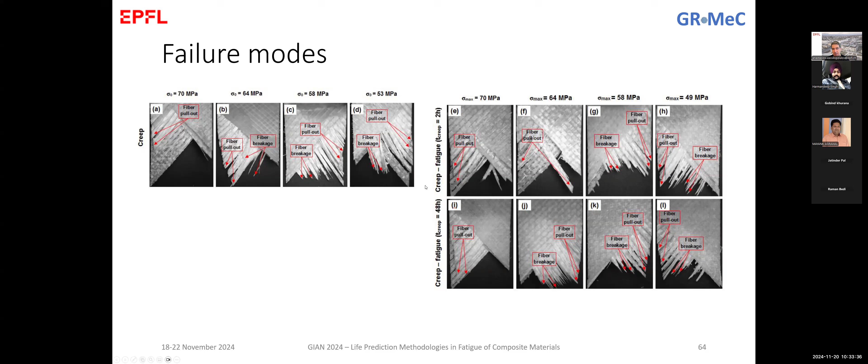So, probably we can, now that we'll talk about interrupted fatigue, using the same joke that we did yesterday, we can interrupt a bit for this first hour to take a break and resume in 5-10 minutes. What, Professor Bedi, if you are still... We can break for 5 minutes. Participants.

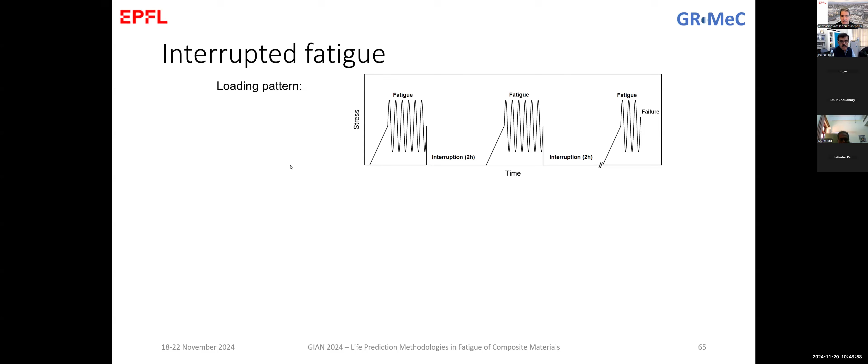So we'll continue with this interrupted fatigue loading to see how the behavior of the material is when we interrupt the continuous fatigue and we unload completely.

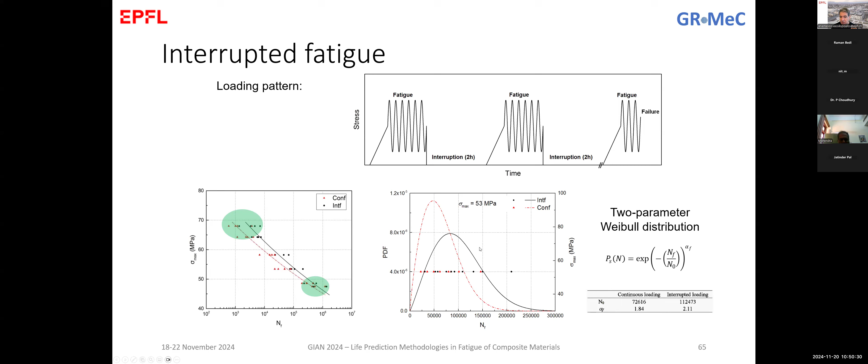There you can see that the behavior is improved quite significantly. From 70,000 cycles, we went to 112,000 cycles. This is the average, the median curve. And as we said before, it becomes more significant when we analyze statistically, when we go to 95% reliability, for example, this increase is significantly more. But at least, in a deterministic analysis, we see that we have 55% more lifetime when we interrupt the fatigue testing.

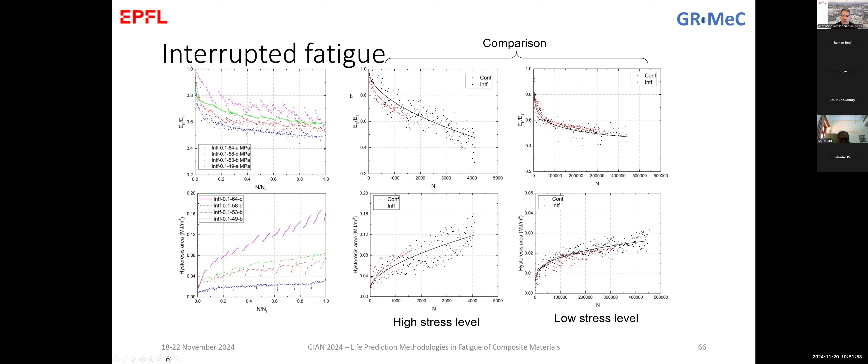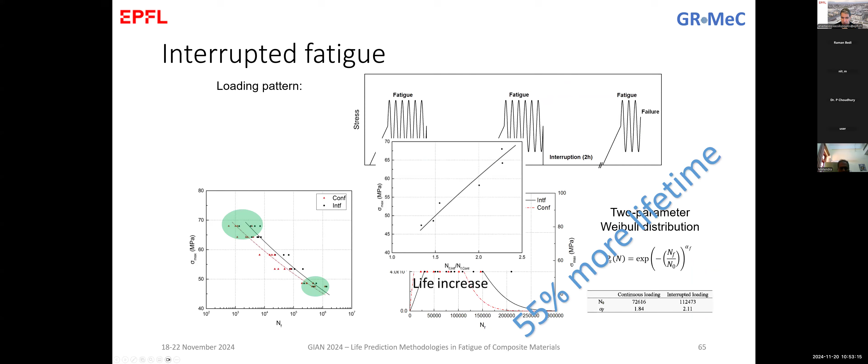And at lower stress levels, as we said before, we have similar behavior of interrupted fatigue and continuous fatigue. This is the reason that if you go back to the SN curves, at low stress levels, we see that the difference is not so significant between the two loading patterns.

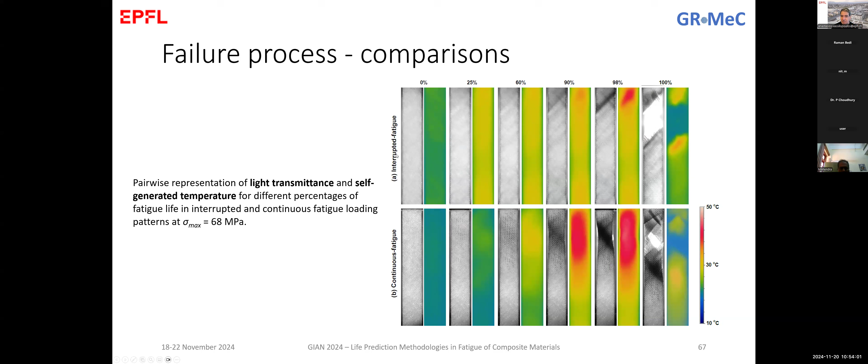So there we have the behavior for interrupted fatigue at high stress levels. We have the same behavior of the material as what we have in the continuous fatigue at low stress levels, in terms of deformation.

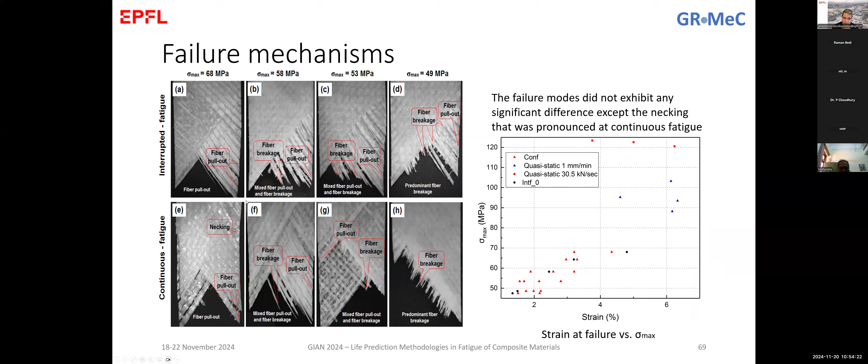So to summarize this material number 2, as we call it, we've seen a lot of increase of the lifetime when we interrupt periodically the loading. This increase, in some cases, you remember this 2-hour creep load interruption - so even if we interrupt the load at the high stress level, sometimes we have increases because of this.

And this is a kind of trigger to make us question the characterization methods and the standardization. Because imagine now that you are discussing and analyzing materials for a structure, and you want to investigate the material behavior to get material properties to use them for your design.

You follow the standards that say you have to do constant amplitude testing for a composite material to derive material properties, and then you use this material in a structure operating under interrupted loading. So by following the standards, you underestimate your material properties. You end up suggesting a material that in reality can sustain more lifetime than the lifetime you are designing for. You are more safe in your design, but at the same time you are over designing, making a structure that is more costly than it should be.

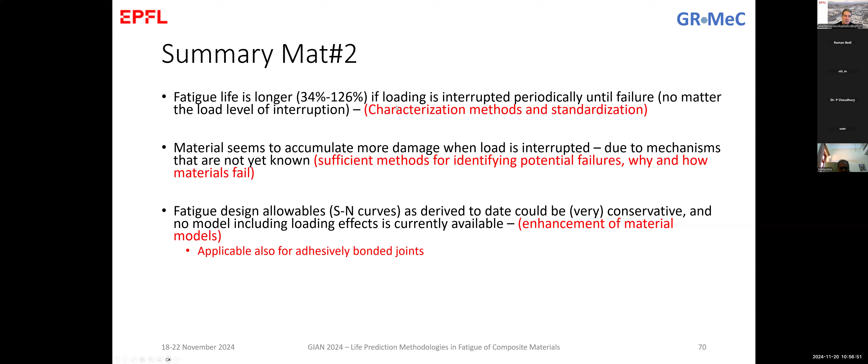And I will summarize this. There's nothing else to say here, I think. So I will continue.

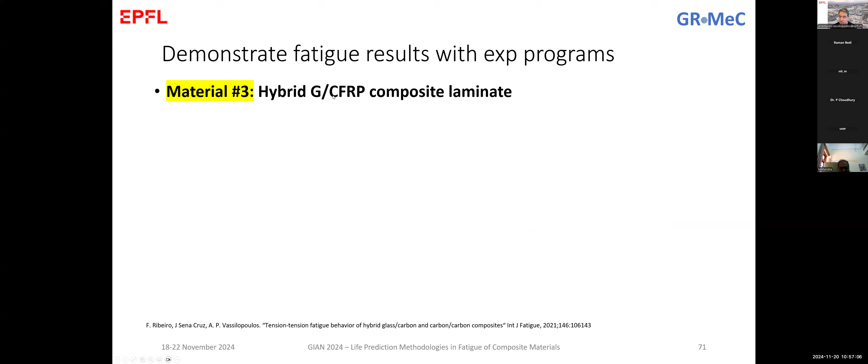Now with another material system, I will go faster and faster. This is a glass and carbon hybrid composite laminate, and we would like to see how this material performs.

I show the material characteristics. Carbon fibers with high modulus, carbon fibers with low modulus, and glass fibers were mixed together in different configurations, causing static and fatigue results. The objective was exactly to investigate the hybrid effect. I don't know if you are familiar with this terminology - what is the hybrid effect in composites, either for static or fatigue performance?

Actually it is the effect of mixing two components. If we go back to the simple notation of a composite material, and if we have a stress and strain curve, we know fibers are very stiff and strong, and the matrix we are using is less stiff and more ductile. When we mix these two, we have a material with a performance that falls in between - this is the composite, this is the fiber, and this is the matrix. So we do not expect the performance of the composite to be better than the fiber or worse than the matrix; it should be in between.

This is also defined - the properties of this composite can be defined by the rule of mixtures, which says that the properties depend on the percentage of these two materials. The hybrid effect is an effect we have in certain configurations of materials, where the properties of the composite we are building sometimes override and become better than the best one of the materials used for the analysis.

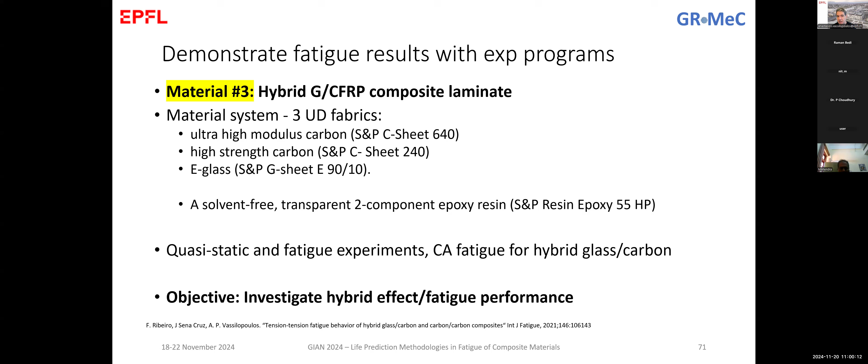This is done because of the hybridization of the properties of the materials used for the mixing. In this case, what is the parameter for the hybridization? The difference in these materials is that the glass fibers, although less stiff and strong than carbon, sustain more strain up to failure. So they introduce ductility to a very stiff system, and this is the reason that this combination of glass and carbon fibers gives a lot of benefits over a pure carbon composite material.

I'll go very fast through these material properties - I will not discuss in detail, only coming back to the initial consideration that carbon fibers are very stiff and very strong. The elastic modulus is 200 gigapascal, and high modulus carbon fibers have 500 gigapascal, with strength very high, around 3 to 4 gigapascal. Glass fibers have a typical 76 to 80 gigapascal modulus, and of course are less stiff, but the strain at failure is 2 to 4 or 5 times more than the strain at failure of carbon fibers, and similar to the strain at failure of the epoxy resin, to have compatibility between them.

These materials are typical materials used in civil engineering, mainly for reinforcement of concrete - these are strips that are glued on concrete slabs to reinforce them.

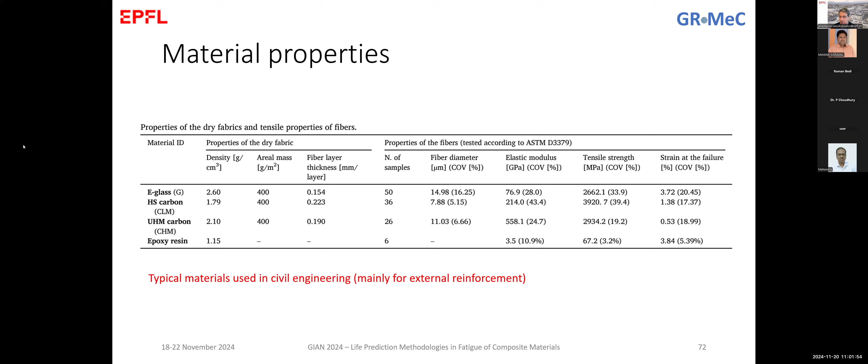That was typically a disturbance, somebody's mic was switched on. So only if there is a question, do not hesitate to interrupt me.

We did several material combinations: carbon and carbon, meaning layers of low modulus and high modulus mixing together, and also combinations of glass and carbon with high modulus mixing together. We selected this high modulus exactly because of the difference in strain. The high modulus has 0.5 strain at failure, glass is 3.7. So we mixed these two to investigate if there is any hybrid effect, and the performance of this material.

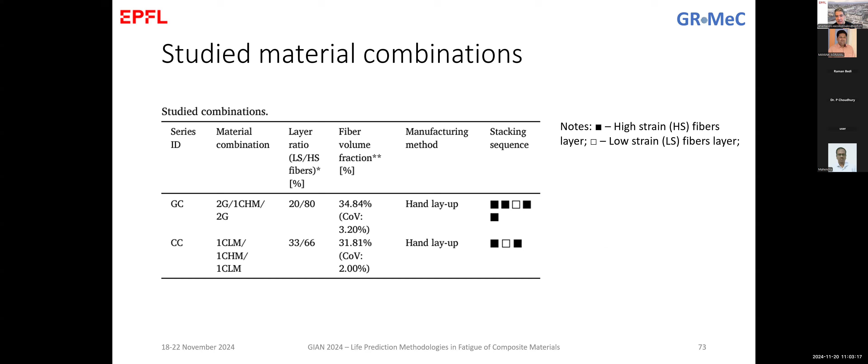We wanted to see if we could create ductility in the system. The material itself is not ductile, but by mixing these two components together, we can artificially create ductility, and that's why we call it pseudo-ductility. It's not a ductility of the material itself.

The setup is similar to what we had before. This is the same machine that we used before, but the chamber you see down there now - we pushed it out of the machine. You can just take it out with racks that we have here, and the specimen is now outside of the chamber. The reason for removing the chamber was because these specific specimens are not heating a lot, so we could do fatigue testing at relatively high frequencies of 10 Hertz without the problem of heating.

We had a DIC camera to take photos and measure the full field strain on the surface, and we had also a high-speed camera that has been used to identify the failure modes.

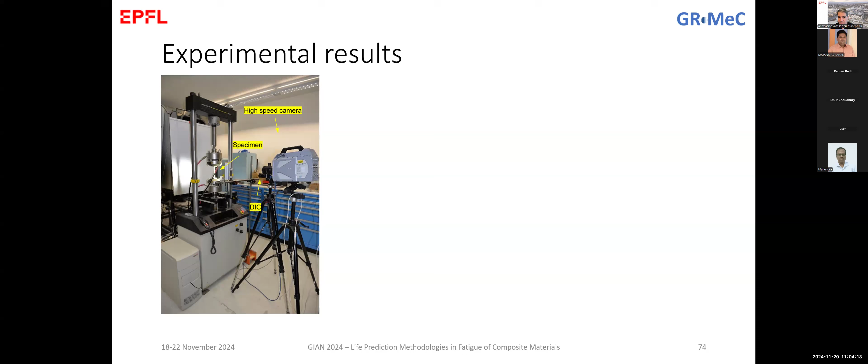This is a very significant effect, because this can help in structures. When a structure fails, the problem we have with composite materials is they are very brittle and fail without prior notice. So we can have a structure that works perfectly, and then this structure fails without any notice.

If we have this behavior, we see that there is redundancy in the system. We start having some failure, but the structure does not fail at that point. It can continue in terms of strain and stress until much later, and this is an indication for us that something happens to the structure. The stiffness you see already is lower here, and we can identify the problems and repair. At the end of the day, you can even save lives with this performance.

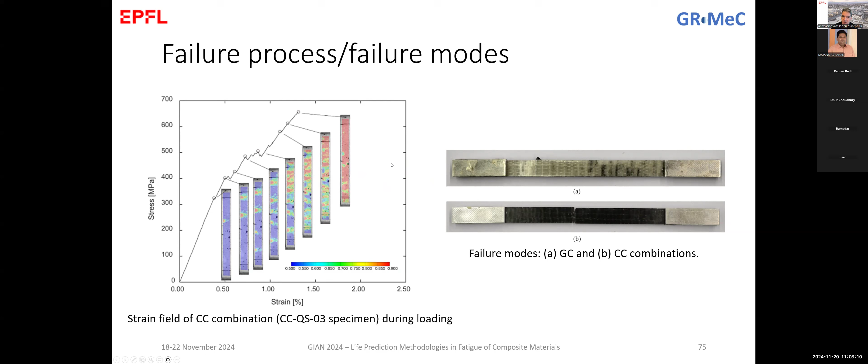If I can assign this to this issue, here you see also a bit of this bilinear behavior, and this behavior starts - the change in stiffness that you can observe in the previous photos and also in this one is starting when you lose the contact between the glass and the carbon, or when one of the layers starts failing. And this creates this damage. What is good here is that you don't have the linear behavior that leads your material to failure at a certain point without any notice of damage in the material. This is the benefit of using these combinations to create this ductility in the system.

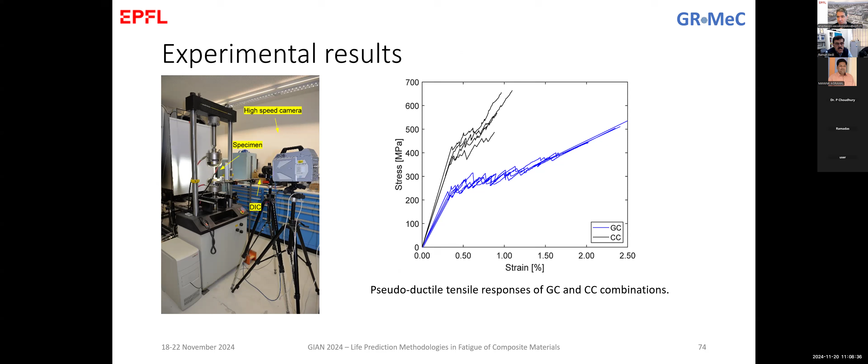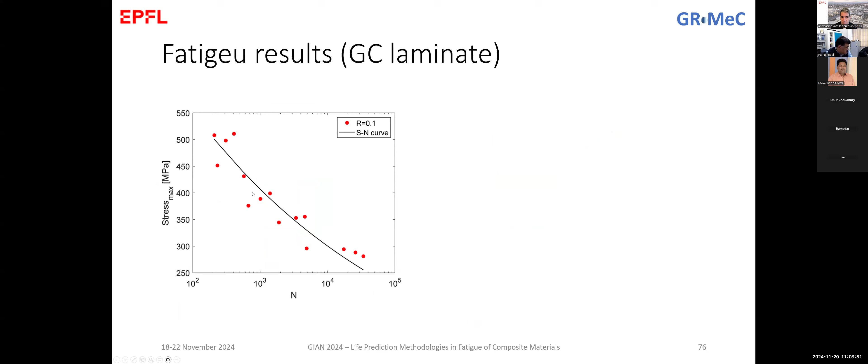Until now we were discussing static loads, quasi-static loading. When we go to fatigue loading, again we observe the stiffness. We observe the typical stiffness degradation. Again here, if you see in fatigue, stiffness drops.

We start initially with a more or less intact specimen with only a few whitening on the glass, which is delamination initiation. Then at a point where stiffness has already dropped, this can be attributed to the bilinear behavior we've seen before. There is already quite significant delamination between the glass and the carbon that causes this stiffness drop.

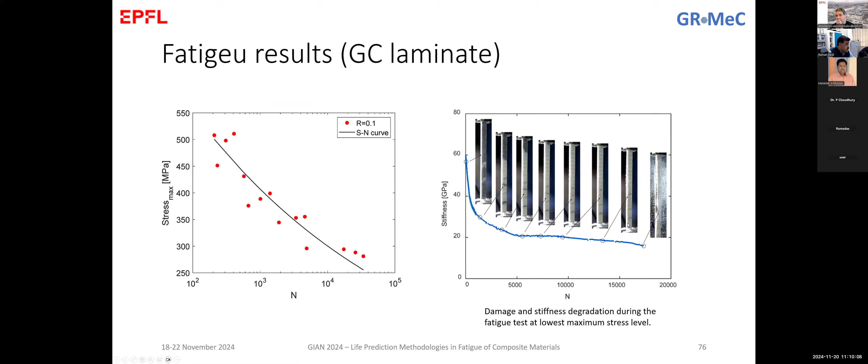This is the same that we've seen in the quasi-static loading. This delamination propagates, the stiffness drops more and more, and it becomes the second stage of stiffness degradation, up to final failure of the material. These photos were taken by the high-speed camera. At the end, we have the final failure of the material due to separation of the layers.

So there is a small video, I hope it works, showing the evolution of the damage with the loading and the stiffness degradation. The failure is at around 20,000 cycles in this case. This was a test at 10 Hertz.

You see we start already having some damaged fibers that are breaking, and then at the end we have this explosive failure where you can see the high modulus carbon fibers in the middle already failed. So there is this ultimate failure of the material.

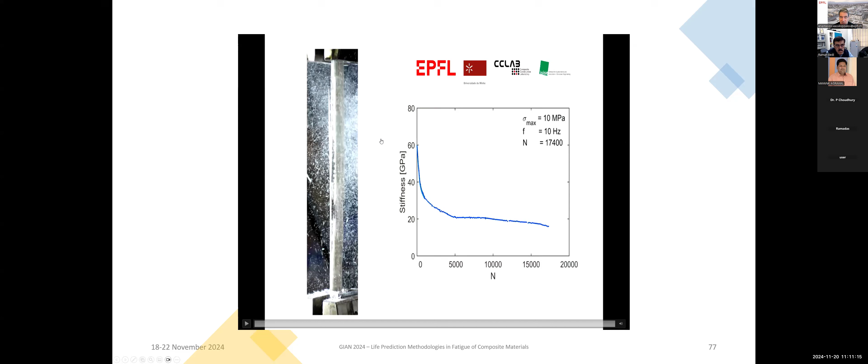This was a work that we did in collaboration with the University of Minho. We had a visiting scholar here that did all this testing and all this analysis.

To summarize the third material, we saw that we can use DIC to observe the fragmentation between the layers, the delamination propagation in both materials. We've seen also a nice effect of hybridization. With this, we managed to have a pseudoductile tensile response, both in quasi-static and fatigue loading.

Again, this is a validation of what we've seen until now. We checked 3-4 different materials, and always the typical laws, the power law formulation for the SN curve, is valid. This formulation was introduced more than 100 years ago. So the methods are practically available for any material system regarding the power law formulations for fatigue, regarding Weibull distribution for all the data, even strength data and stiffness data, they all follow more or less a Weibull distribution.

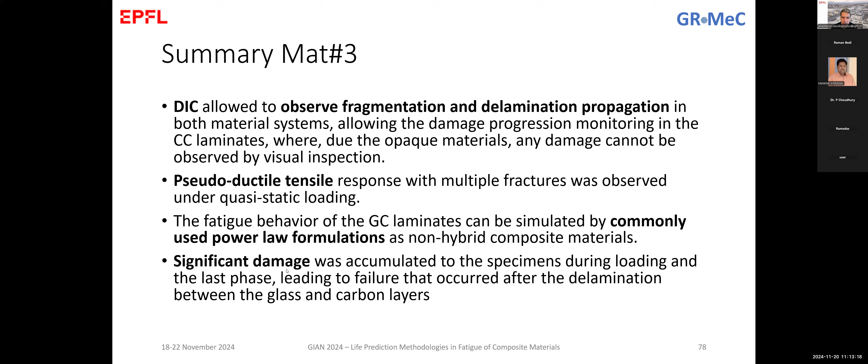For the specific material, material 3, which is this hybrid composite, we've seen that we had damage that was initially localized and then distributed to cause delamination between the carbon and glass fibers. This is due exactly to the difference in the strain at failure of these two components. One is much stiffer than the other, and when we load, we lose somehow the compatibility between them.

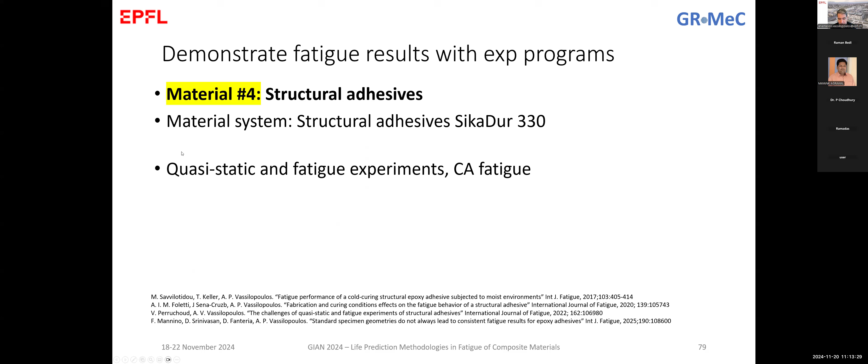So then I will also explain a bit the behavior of structural adhesives. Let's go fast with these two last materials before the next break.

Here we investigated structural adhesives. I suppose you know what is a structural adhesive - it's a glue that is used to do connections. So you see now I'm doing the transfer from laminates to adhesively bonded connections that are used very widely in engineering applications of any type, from aerospace to civil engineering to automotive.

We always have structural connections made by adhesive, and actually they are very much preferred compared to bolted connections for a lot of reasons. There is a huge list of reasons that promote adhesively bonded connections. What we did here, we did a lot of studies. If I want to talk about this material I can talk for hours, because we investigated structural adhesives for more than 10 years, and we have a lot of results on quasi-static and fatigue experiments.

Usually we try to investigate the fatigue performance, but also the durability, so the effect of the environmental conditions for these materials, because these materials are used in engineering applications in the open air, so there you have effect of the environment. We also try to investigate the effect of - here I wrote effect of voids, but actually it's the effect of the material itself initially on the properties of the adhesive, but also at the next stage on the properties of the adhesively bonded joints.

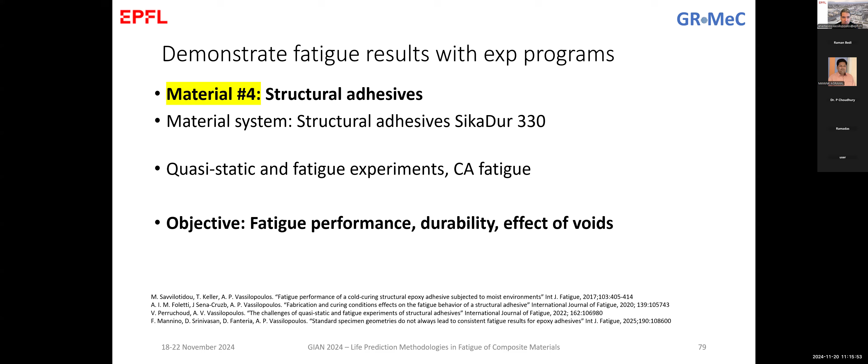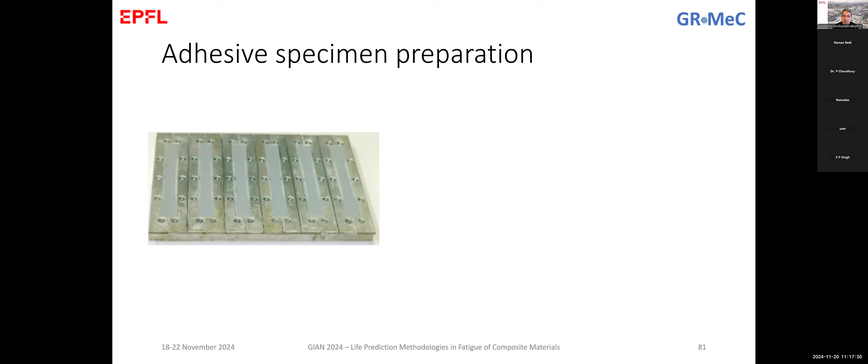So how we prepare the specimens, we have either steel molds or plastic molds, and we can pour the material in the mold and carefully work with a spatula there to spread the material well. Another way that you can do is to prepare a plate with a certain thickness that you need, and then you can cut your specimens with a water jet cutting machine.

And this is probably more accurate than this method, and it's also simpler to do. But again, for both methods, there are advantages and disadvantages. So we used both, and we have results with both methods.

So again, the setup is similar to what we had before, with the specimen mounted on the machine. This is a different machine. It's an electrodynamic machine, not a hydraulic machine. It's a new machine from MTS that can apply loads up to 3 kilonewton. So it's a small machine, but not with hydraulic pressure, with electrical motors.

And again, here we use the DIC camera. We use the high-speed camera to take some photos of the specimen when it fails.

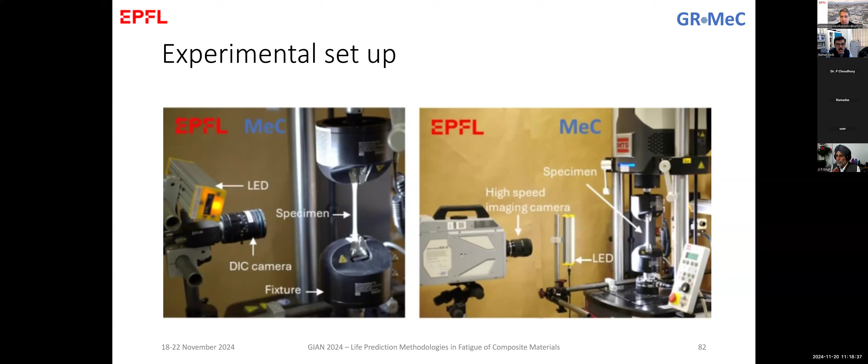So regarding durability, you remember we discussed before that composites are very hydrophilic, most of them, so they can absorb water. And imagine now that you have this adhesive system in a bridge over a river where you have a lot of humidity, so water can be absorbed. And we've seen that water in this material is saturated when it reaches around 3.5% in weight increase.

So there, after this time, for this testing program, we also did desorption. So we tried to take water out. And then we have 3 types of specimens that you can see here: the dry ones, those specimens that are fabricated in the lab and were not immersed in water; the wet specimens; and the dried specimens, those that were saturated and then dried under a specific protocol that we followed.

So if we jump to the results, we see that, for example, here you have the blue ones that are the dry ones, the wet ones, so those that were immersed in water are the green ones, and the dried ones are the red ones.

And the curves that you see here are the 5 and 95% curves that I drew based on the ASTM suggestion. So actually these curves every time show the range where we can expect 95% of the specimens of each class to fail. And what we can observe here is that the dried specimens are the best among all.

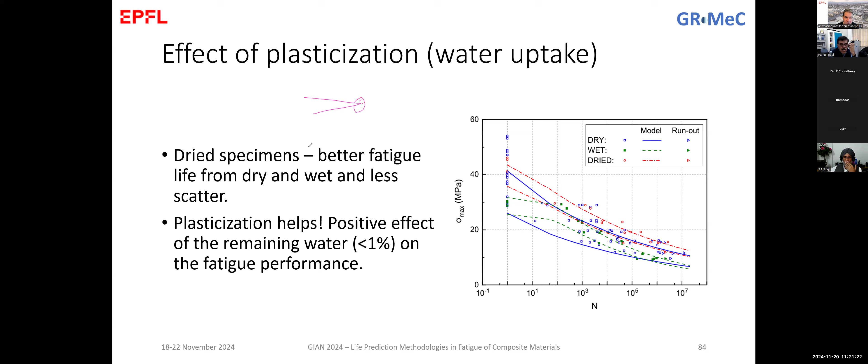So we also did another investigation with the same material, where we tried to check which fabrication method is the best.

You see, usually these adhesives are also called cold curing adhesives because they allow their use in open air applications where you don't need to heat the material. You just pour the material, mix the base resin with the catalyst, the hardener, and then you let the material there to cure.

And we know that the material needs some days, 7-10 days. It's like concrete - concrete stiffens in 28 days. So adhesives are also stiffening, getting cured, polymerized in more than 7 days. This is what is written in the data sheets.

But then what we observed with the investigation that I showed in 2017, is that the material behavior is developing also during time.

You can have increase of the properties even in the first year of the adhesive during operation. So here we try to see if it is probably better to do some post-curing during fabrication to help the material achieve maximum properties faster. So we did 4 different curing conditions for the fabrication.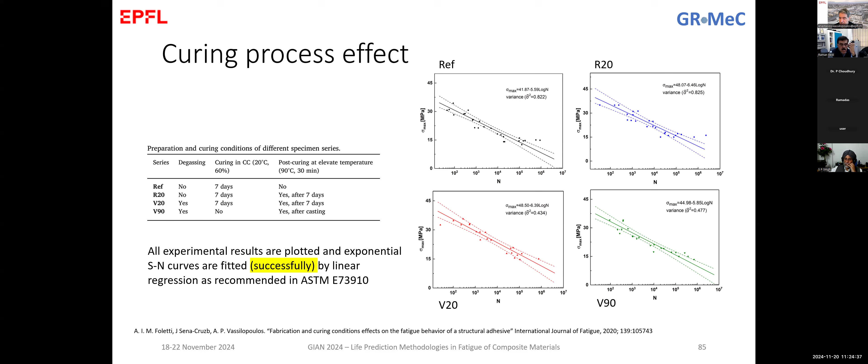And if we go to compare the behavior, again this validates the fitting for these results. We can see that the reference samples are the lowest, showing the lowest fatigue performance, and this is attributed to the post-curing.

Remember, I said the specimens continuously increase their properties even up to a year. So these reference specimens, if we test them again after a year, we expect they will show performance relevant to the other lines, which correspond to specimens that have already been post-cured. So the post-curing helps, and we've seen that it helps when it is not immediately after mixing.

So the green one is the V90 - remember, we mixed and then post-cured directly. This seems not as beneficial as the performance of the red ones, where we let the material cure at room temperature and then post-cured after 7 days. So the best performance we found for these materials is given by the V20 specimens.

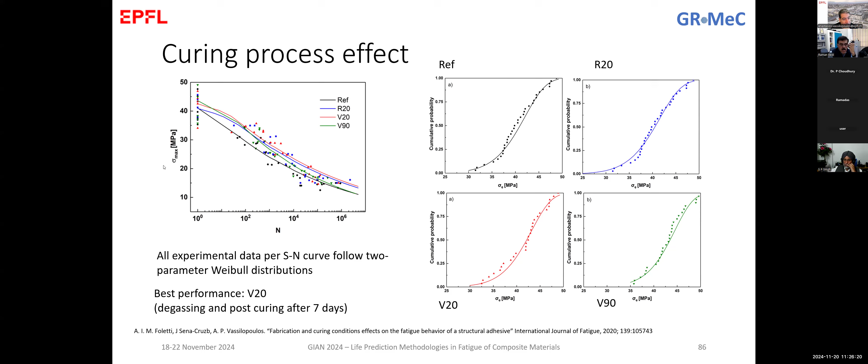We also continued- Sorry, is this tension loading? This is tension, yes, tension at R equals 0.1, I think it was written here. Okay, thank you, sorry, I didn't mention that. It's always tension at 0.1. Okay, thank you. No, it was not mentioned, you're right.

Imagine you have a specimen with two tabs. If one tab is misaligned a bit because you put more glue and didn't press well, the specimen ends up tilted. When you close the machine, this causes stress concentrations. If there is a gap in the glue you put between the specimen and the tab, this again can cause stress concentrations, which can be significant and cause a lot of tab failures in the material.

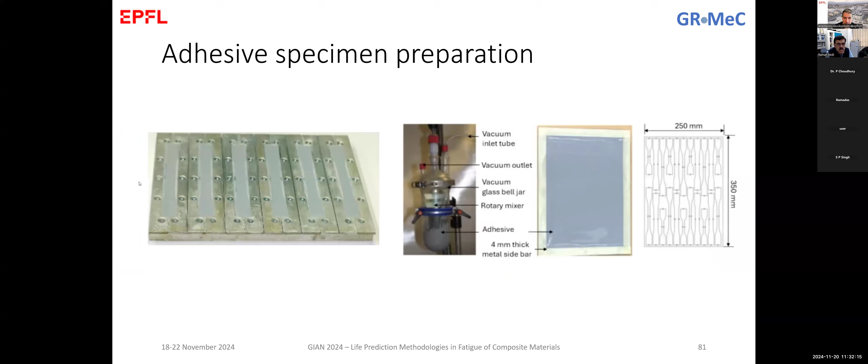Non-standard samples, yes. We made a specimen with huge areas on the tab, so that if you press here, you can transfer the load, because the tab, the grip, transfers the load in shear - so there you need a lot of area. The more area you have, the less stress concentration you have. The standard might tell you to use a typical dog bone specimen, but in this case that area might not be enough if your specimen is stiff and strong. So you need to increase this area artificially yourself to allow correct transfer of this shear loading without stress concentrations.

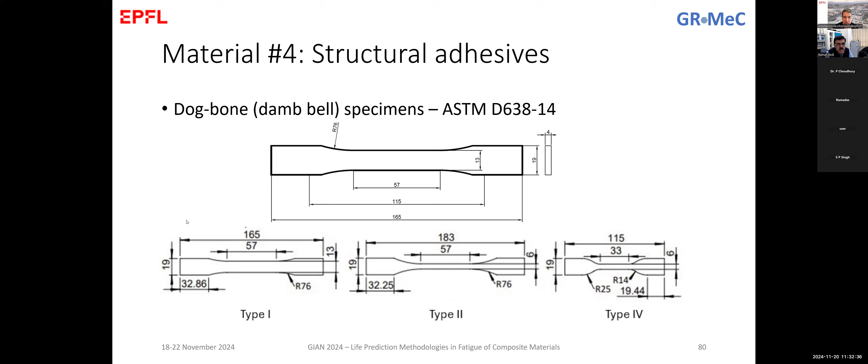I think the gauge length also plays a role in this. Of course - you work with a smaller gauge length for high stiffness material, very small. You will also see the comparison between the type 1, type 2, and type 4 specimens that we did.

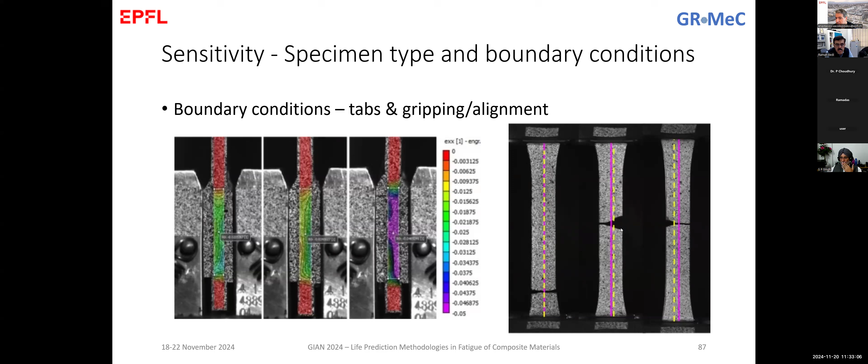Here again, the alignment plays a significant role. We've seen that if there is a slight misalignment of the specimens, like what we have in the middle or on the right, we had a kind of bending in the specimen, and there was always a small piece coming out of the specimen during failure.

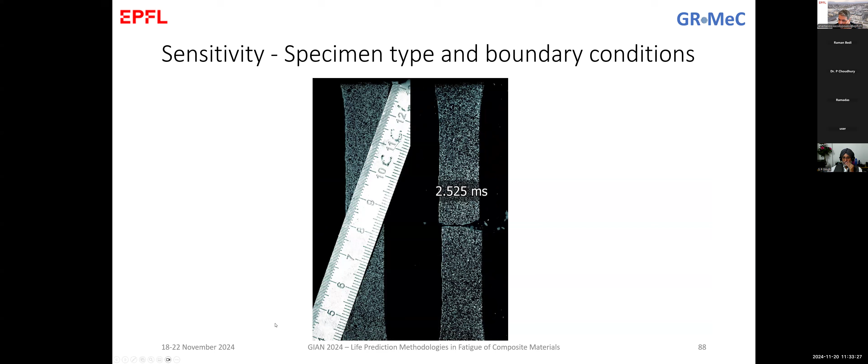There is footage here - this is a high-speed camera measurement. You see the specimen on the right hand here, there's always this small piece that comes out. Let me run it. This is a failure of the specimen, and exactly what you see here on the right hand is this effect of the misalignment.

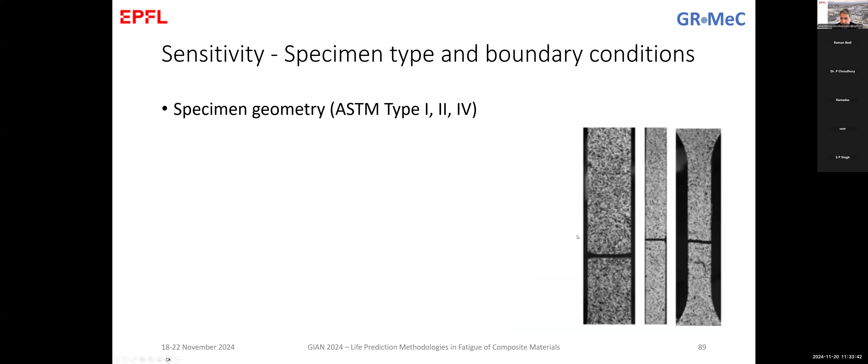As I said before, we investigated the effect of three different specimen types. This is specimen type 1, this is specimen type 2 - same length but thinner, and this is specimen type 4, which is as thin as type 2 but shorter.

We did a lot of fatigue testing for this, and we tried to reduce what you see here - we call this cleaned data sets, where we censored all the specimens that failed at the tabs. So we only kept what we call the good failures.

We plotted this in fatigue SN curves, the stress and SN plots, and we also fit reliability distributions. We've seen an obvious and very significant trend showing that type 4 specimens, which are shorter and thinner, are better than type 2 specimens that have the same thickness. So there is a size effect in this case. And both are much better than the specimens of type 1.

And here is the big question. ASTM says whatever specimen you take, if you have a good failure at the middle, as we have here, you should have the same results. And what we've seen is that we don't have the same results at all.

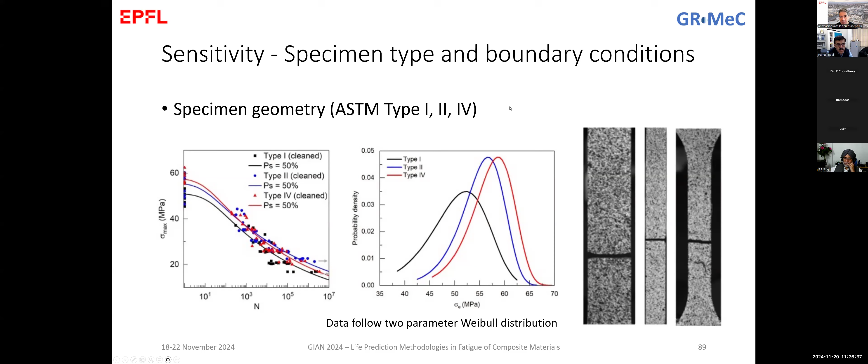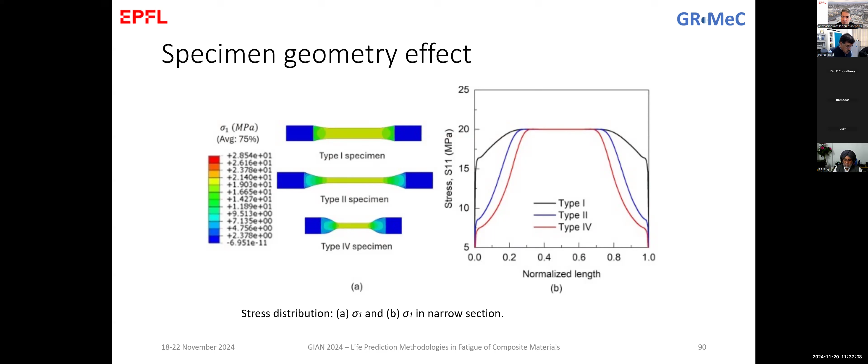We did also a bit of analysis to show why this happens, and probably it is because of the stress at the end. We've seen that at the region of the failure, the stress for all of them is always the same, and it is always with a consistent area, so we have a good uniform stress distribution. So there is no problem with any of the specimens in this sense.

We also investigated the frequency effect. As we said before, the higher the frequency, the better it is, as long as you don't heat up. We've seen that even at 40 hertz, which is a very high frequency, it did not cause significant heating. Actually, it helped a bit - with the frequency increase, we can shift the curve to the right, so we can increase the performance a bit.

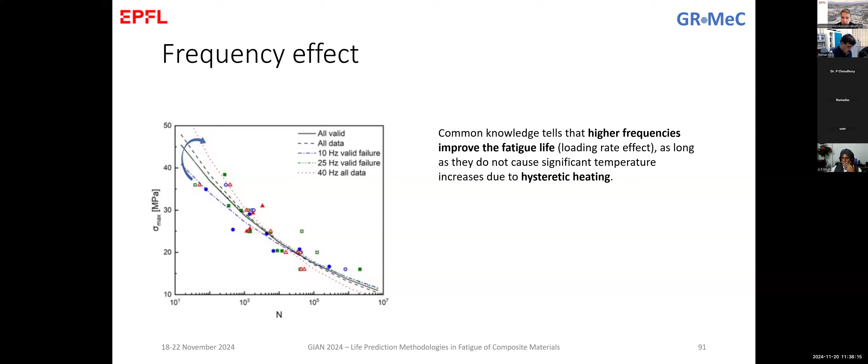What tells us not to use this 40 hertz for the specimens is that by using 40 hertz, we increase a lot the tab failures. And this again is because the loading rate is very high. So the tab failures are becoming much more frequent in this sense.

So to summarize again for material number 4: DIC is again useful for giving significant information. The methods used for simulation are again valid, Weibull curves are valid for these specimens. And we have understanding that for other specimens, the considerations from the standards have to be thought twice before being followed, and we have to be very careful when we prepare the specimens. We've seen that the preparation of the specimen itself, the geometry, the alignment in the machine is very significant and can affect the results a lot.

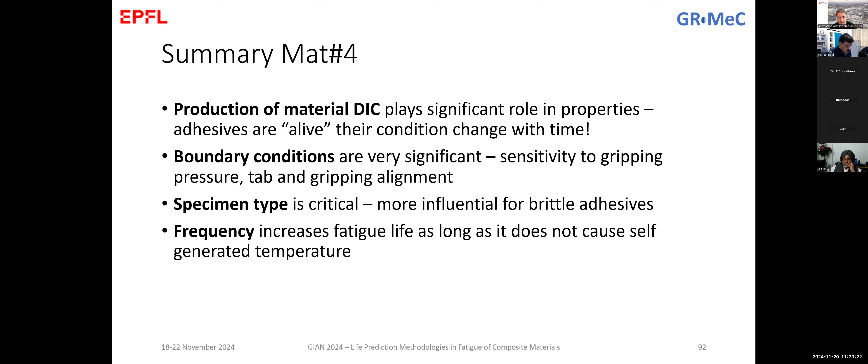So if you don't mind, Raman, I can go very briefly into this before we do the second break. We already passed a bit of time, as you advised. It's up to you - we can take a break, or you can continue for some more time and then take a break. As you wish, because this is the last material I will describe, and then I will describe a bit the methods we have for the statistical analysis for the fatigue data. So slowly I will go to the modeling in this sense. Yeah, so you can take your time, no issue. Okay, let me go. I will go very fast.

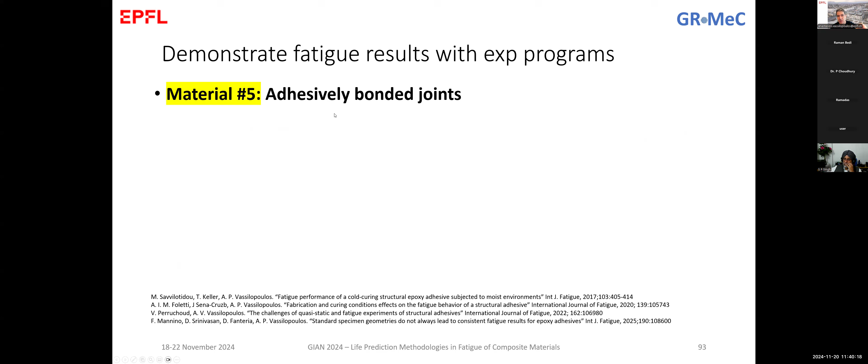So here we talked about adhesives, we talked about composites, and now is when we mix these two and make adhesively bonded joints. And there we did again a lot of investigations in the past, and of course the set objectives were again the fatigue and fracture performance. Now we are also introducing the fracture behavior of the materials in terms of long-term performance, which means durability, and of course all these investigations are for achieving finally a modeling of the material.

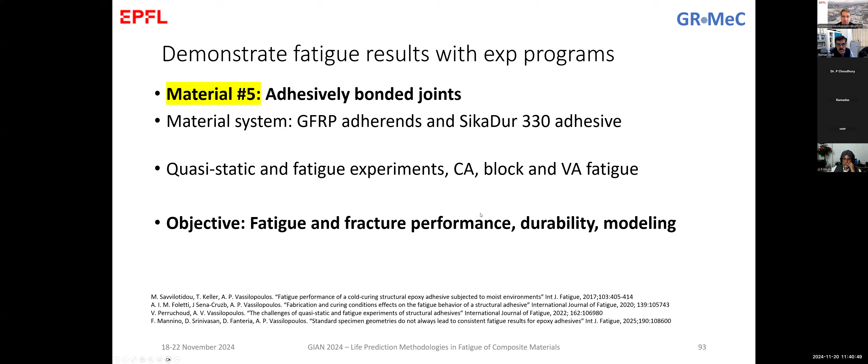So in this case, here I saw a testing program with double lap joints. This is the geometry, and this is the focus on the area here of the joint, where the objective here is, of course, to investigate the fatigue performance.

And when we talk about joints, we don't talk anymore about purely life of the joint, but we want to see also how the damage progresses. Damage in a joint is usually a crack that is initiated either artificially or physically, without any pre-crack, in several locations. It might start here, there, or wherever. We need to follow this crack propagation.

That's why we used, in this case, crack propagation gauges. Actually, these are gauges like normal strain gauges, but they work in a different way. They have vertical wires, and when the crack goes, it cuts a wire. It changes the electrical signal, and that's how we measure the crack propagation.

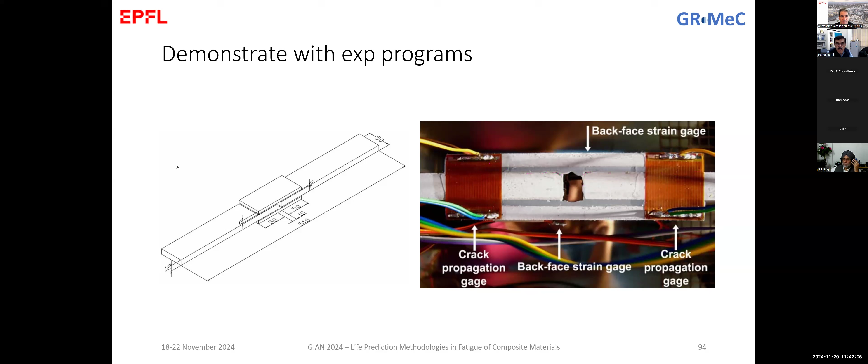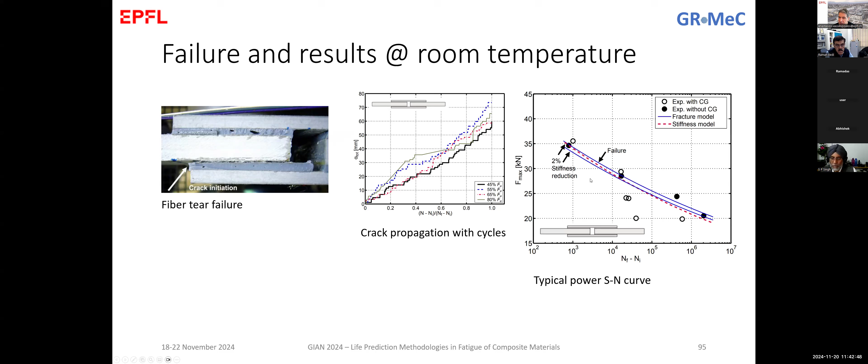So we did this testing in a lot of different types of loading. As we said before, we measured the crack propagation with cycles. The crack initiated here and propagated with cycles in this trend, a kind of linear trend up to failure. We also created SN curves, and we again saw that these SN curves can be fitted by typical power law equations. I will discuss later on about this stiffness reduction, another type of SN curve that we introduced.

So we did also durability analysis, which means we did again fatigue testing, but for specimens that were preconditioned: specimens at minus 35 degrees, very cold conditions, Swiss conditions; typical laboratory conditions, 23 degrees and 50% relative humidity; and at higher temperatures but the same humidity levels, and at higher temperatures with specimens immersed in water.

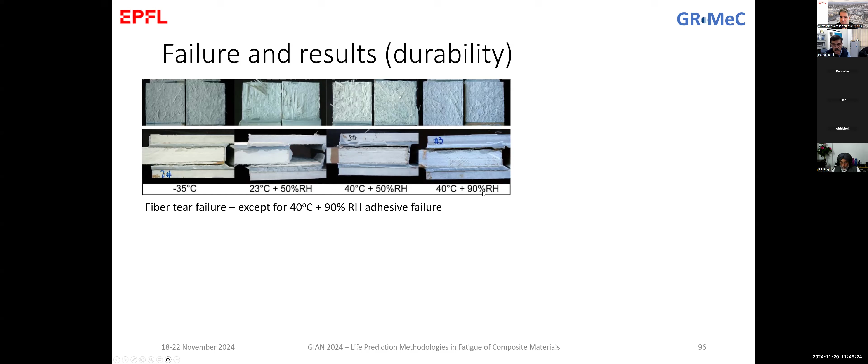So typical stiffness degradation, as before, very few stiffness degradation - only 5 to 7, 8% until failure. And of course the expected behavior with the environmental conditions, where the best case scenario is the specimens tested at minus 35, then 23, then 40 without water, and the worst case was 40 degrees and 90% relative humidity.

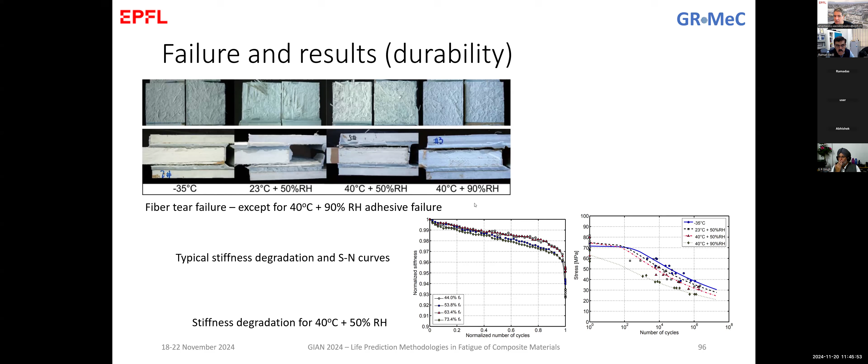Question: when you did the conditioning, was the complete specimen conditioned, not just the adhesive part alone? The complete specimen was in either a specific temperature or in water. The conditioning was done on the specimen in advance. The testing was done in an environmental chamber, but without conditioning - so the specimen that had 90% water was not tested in water. It was preconditioned there, and then the test was done in normal, ambient conditions.

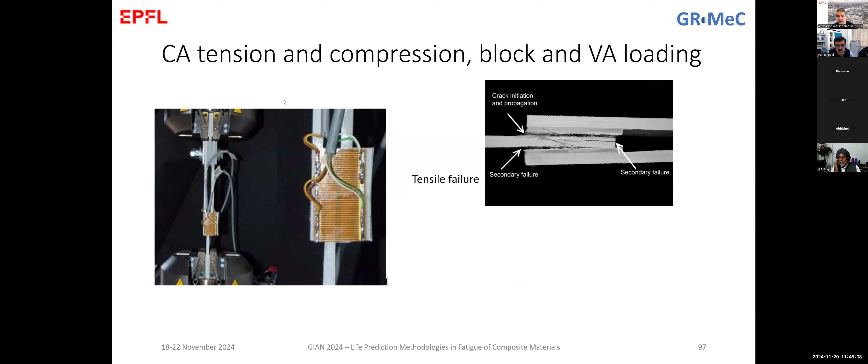So the fatigue testing continued with block loading and variable amplitude loading. We also had block loading where we applied tensile loading and compressive loading. What is very interesting here is that in tensile loading, we had the typical failure of cracks propagating along the bond line on both sides - this was a secondary failure after the failure of the main, basic failure. We had this secondary failure. But then when we go to compressive failure, the material started failing in the middle.

So here - I didn't describe the material before - the adherends used were pultruded elements that had unidirectional layers in the middle. So actually here the material failed in a mode 1 condition of this internal layer, and this was due to the compression - these two elements buckled and opened like this.

The interesting thing is that the mode 1 fracture behavior of the adhesive, at the region where we have the adhesive joint, was much better than the mode 1 performance of the adherend itself, so the composite itself. This is the reason for having the failure, so the crack initiated in the middle instead of initiating somewhere at the edges.

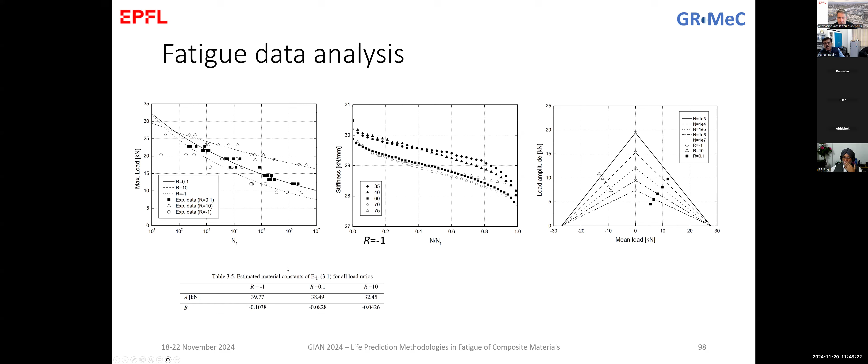So we did also the fatigue data analysis. Again, plots that are relevant to any other type of material, stiffness degradation that is similar to other types of material, and then the constant life diagrams. Here we see that the typical Goodman diagram shown is not valid for this material. It underestimates the behavior in compression and overestimates the behavior in tension. And we have also the typical damage parameters here.

So we performed more testing. I talked about a lot of testing for mean load effects. We created 3, 6, 9 SN curves at different loading conditions, and established this piecewise linear constant life diagram, which is accurate because it uses all the fatigue data.

Coming back to the discussion we had before, regions that are closer to R equal to 1 are regions where we have creep-dominated fatigue. Regions that are around 0.1 or 10 are more fatigue-dominated. This is the case where we have reverse loading, plus and minus at 0. Theoretically, this is a case where we have alternating loads above and below 0 mean stress. Theoretically, this is the pure fatigue condition, where we have a 0 mean stress.

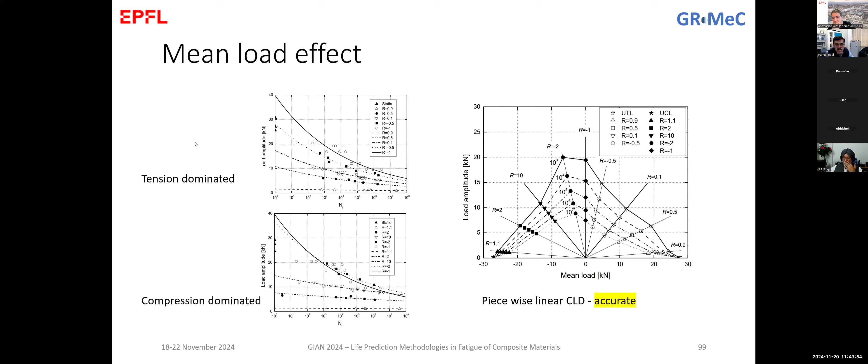I will respond in a different way. The specimen we tested in fatigue, the idea was to avoid any buckling, so the specimen in fatigue had already a smaller material here. The tensile specimen was longer. So the tensile specimen, if I draw it here in the same way, it was like that. It was fixed here. And for compression, we avoid buckling here. We didn't have failure in this area because of buckling; it buckled here, but it didn't fail. So the idea was to see how the joint behaves, since the investigation for us is the joint area.

And we wanted to see how the joint behaves in compression. You don't have another way to do this test instead of performing a test like that. What we could do, to follow your suggestion, was to make here a very stiff element that doesn't buckle, and then it would be a pure compression. So what we have here is not a pure compression. I agree with you. But we saw what happens in the joint, because the joint itself is compressed, and when it's compressed we had bending moments here because of this opening, and we had this mode 1 that happened. It's not a pure compression. I'm with you on that. Okay, thank you so much.

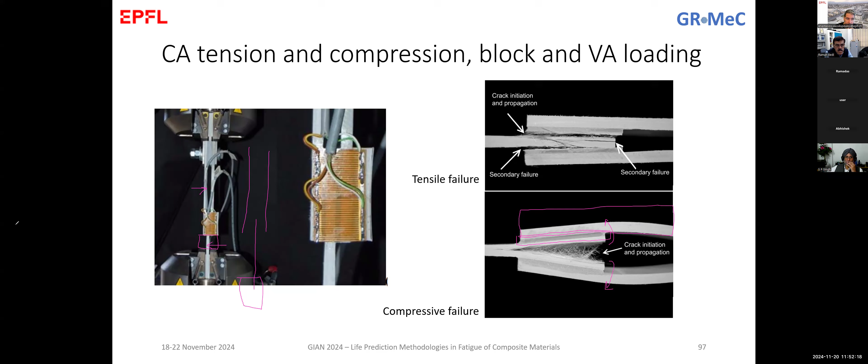So with this I'll summarize. The conclusion is, as we said before, that we have measurement techniques for everything, and we have common methods to simulate material behavior independent of the material system, and more or less all materials follow the same trends. The SN curve is more or less a power curve on the SN plane. The stiffness degradation has this sigmoid behavior, degrading up to the end. The constant life diagrams are not Goodman-like diagrams, but depending on the material system, might be more tension dominated or compression dominated, and so on.

So this is very nice for us, because with that we can understand that material modeling is becoming easier in this sense. We don't have to create a model per se for each material system, but we need to adapt the model parameters for any material combination.